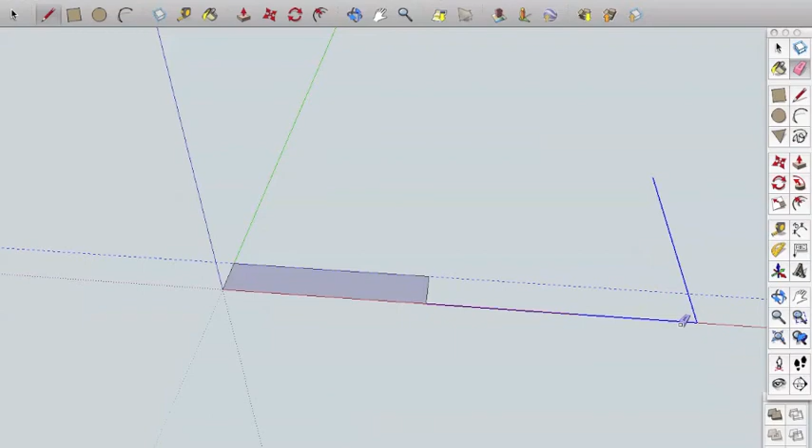Google SketchUp is great because it really snaps to everything. It finds the points and the connections. I can get rid of my ruler guides too. Alright, now we're left with just the square quarter of the rough dimensions of our board.

So you can go into camera and you've got all these different views, and the shortcuts are right there. They're handy when you're designing, so I'm just going to do a top-down view here. We're just going to really quickly draw a shape on this board. This is nothing specific, just to go through the motions of how we would design this.

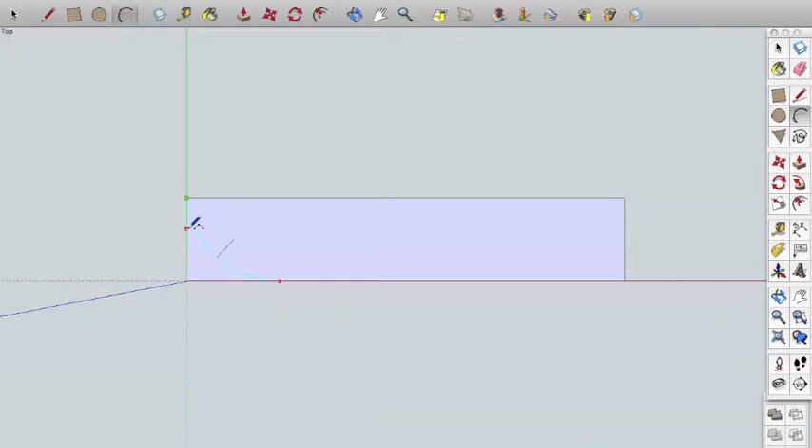So when that line snaps blue, it's tangent to the edge, which is great. And you can actually see, if I zoom in, that in SketchUp what we have here is a series of straight lines that make up our curve. So when you're doing finer work, it's definitely important to be cognizant of that. You can make those lines smaller and smaller if you want, so that they're virtually unnoticeable.

So we've got the tip of our board right there, and now we just need some side cut. Let's say I want my side cut depth to be 2.5 centimeters. The details are definitely in the design when you're doing this for yourself, so you definitely want to be specific about the numbers.

And you can go on a lot of companies' websites and take a look at what they've done. They usually post that stuff, contact edge length and all that type of thing. So I'm just going to draw this in here, a nice little side cut. I just want to zoom in and make sure I didn't go over my measurement, and it looks like I'm good.

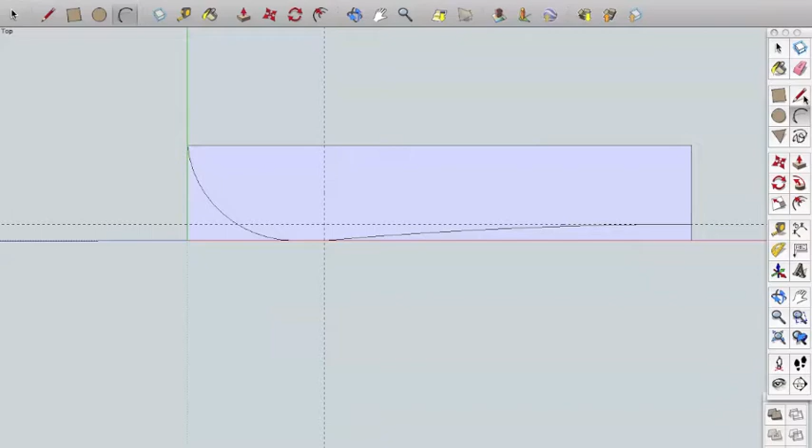Alright, so I've got my rough shape of the top-down dimension of my snowboard. And I'm already at 5 minutes.

Next thing we need to do is just quickly design the side profile of the snowboard. So I'm going to do that by snapping out a line the same length here. If I hover over a corner and move out, it'll snap, so that line is the exact same length as this line here. Now I'm just going to quickly draw it up into the blue axis so that I connect them all together, and then you can see I've got a face, and I'm just doing this so you guys can see clearly what I'm doing here.

Alright, so we'll just go with a straight camber board here for the purposes of being quick. The last tutorial I recorded was half an hour, I did a camber rocker combo, and I think that's where all the time went.

So I'm going to use my tape measure. Let's say I want 2 centimeters of camber, type that in, click enter. What I'm doing is I'm clicking on the edge, pulling up, and then typing my measurement in that bottom box where it says length, and it'll automatically go to that. So right down here you can see. At any point if I want to check a length, I can click on one edge and move it over, and it'll usually snap and give me that measurement. So this is a great tool.

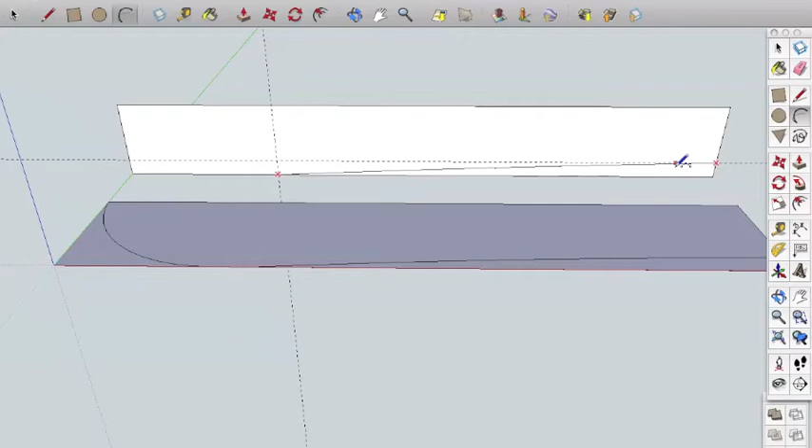Alright, let's say I want my camber to end at 56 centimeters from the middle. There we go, so I'm going to just draw that to there. This might be a lot of camber. It does look like a lot of camber, but for the purposes of showing you this quickly, I'm just going to do it.

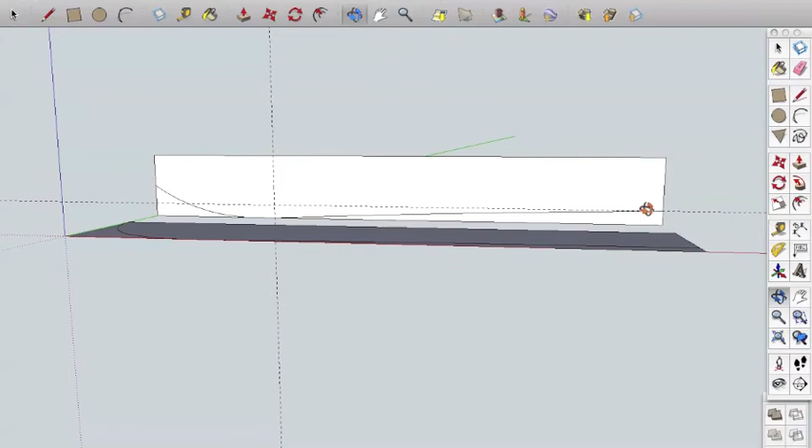Now I might just leave a little bit of a flat spot in here, and I don't want my tip to be too high up. I'm not going to actually make any measurements here, I'm just going to throw that in just like that. So you can see that's the bottom profile of my snowboard right there. This is the bottom of the side profile. Now what I need to do is thicken it to where my core will actually be, and then we've got the top profile there.

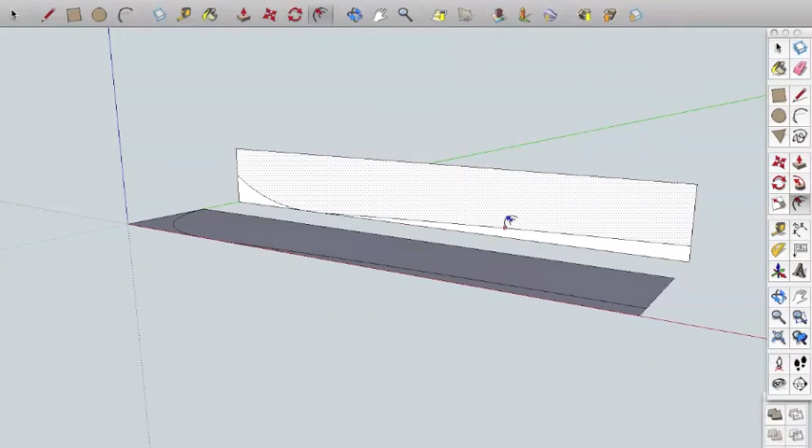Alright, get rid of these ruler guides. I'm going to use this tool here, and make my core 6 millimeters at the thickest point.

And then I also need to make a taper in the tip. So what I'm going to do is just delete these extra lines I don't need. Delete that one.

Alright, let's say I want it to start tapering after my binding. I haven't done this yet, but let's just quickly snap a measurement out. I like a wide stance, about 24-25 inches. Even though we're working in metric here, we can just type in inches. So half of 24 would be 12, so I'll make sure I put the inch sign, and that'll snap right there. I can see, because both my profiles are lined up, right where my binding will be.

So that means I'm going to want it to start transitioning somewhere around here. So I'm just going to draw a quick line up to isolate this side. I'm going to use this tool again, but this time go to about 2 millimeter thickness, which is fairly common for tip spacers.

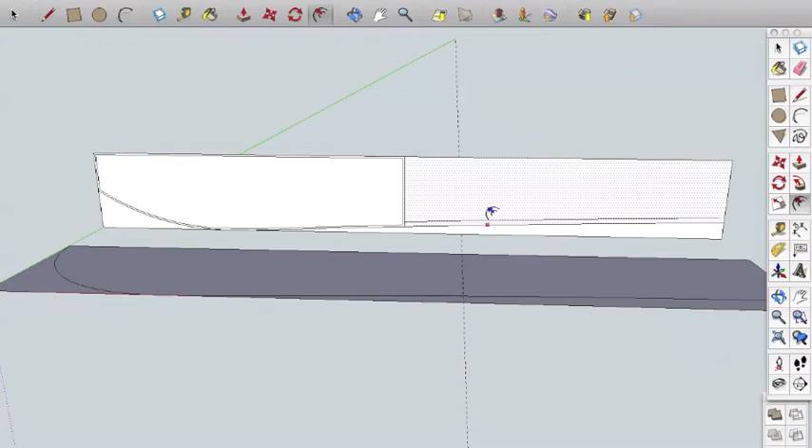So now I've got my 6 millimeter profile, my 2 millimeter profile. Again I need to go in and delete these excess lines, and this little guy here. Get rid of that one, get rid of that one.

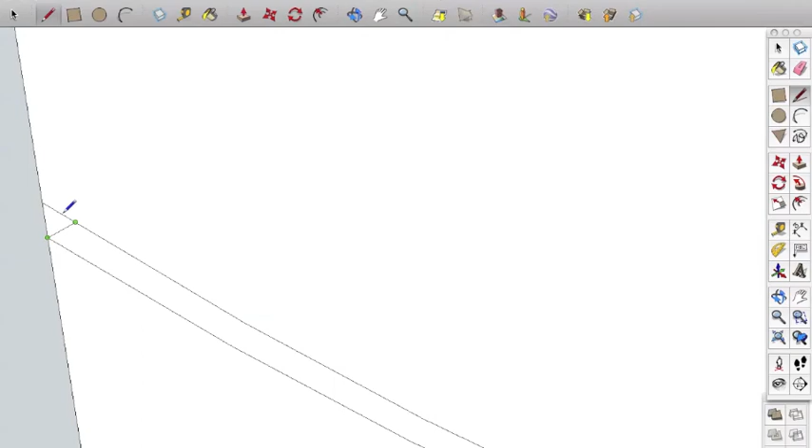Alright, in the tip here I just want to make sure it goes right to the edge, so just follow that straight, and then I actually need to connect it at a 90 from what the base angle is. You can see it just turns pink and snaps right to it like that. At this point I can actually get rid of this and this, probably get rid of that.

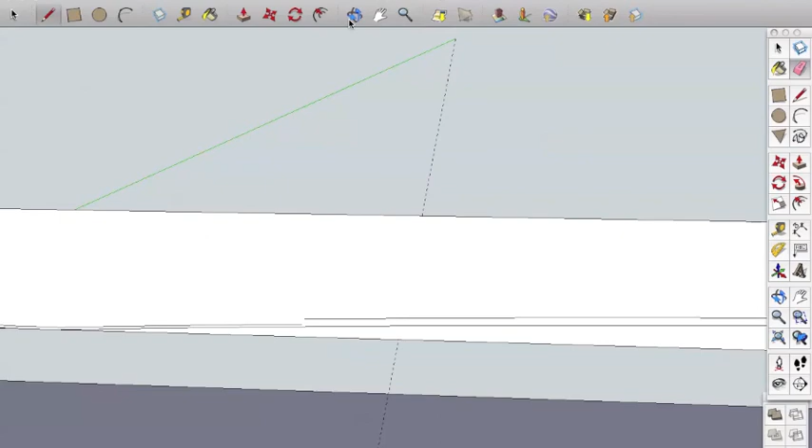Actually let's go back a second. Let's just get rid of that one for now so you can see what's going on here. Alright, I'm at the 10-minute mark, and this is turning into a long video again.

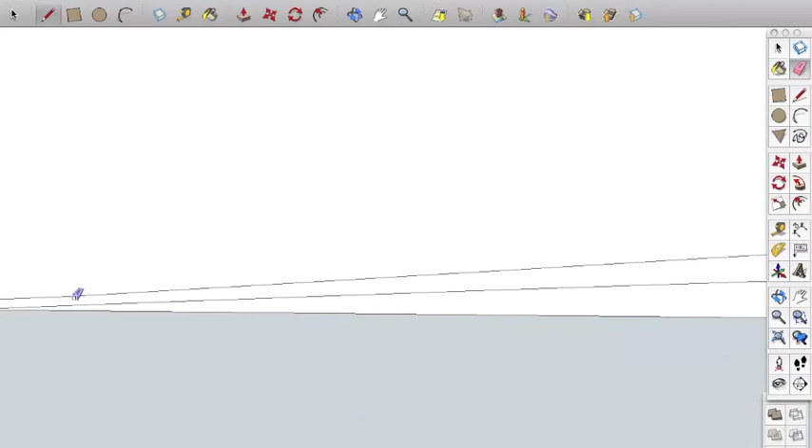Okay so I need my core to taper, so I'm going to just grab that. I'm going to just have it taper in randomly. I'm going to get rid of this excess line, make sure there's no little bit sticking out there. Looks like we're good, now I've got my tapering core.

This end actually didn't connect either because of how I pulled the measurement off there, so I just want to make sure that that actually connects. And now we can get rid of all the excess.

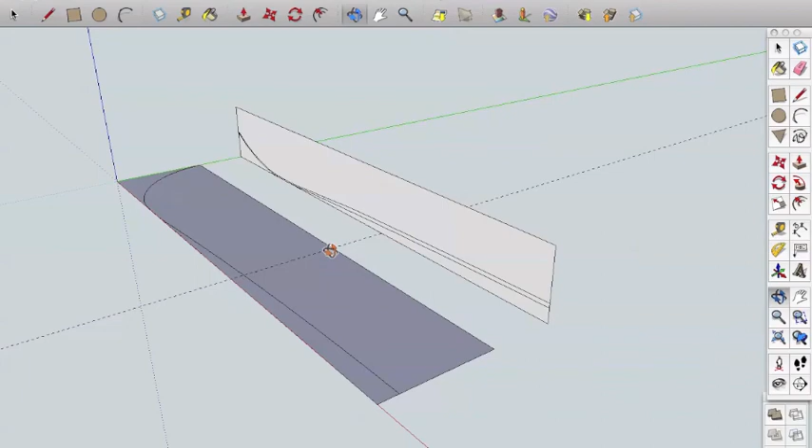But what we're going to do first is draw some binding inserts in here, and then make a copy of all this so we can easily come back and change anything we want. Binding inserts are typically 4 centimeters by 4 centimeters apart from each other, so half of that would be 2. So 2 centimeters is that one, and if this is the center of my stance, I'm going to go 2 centimeters off this side, 2 centimeters off this side, and just plunk some little circles in there so I've got a nice visual.

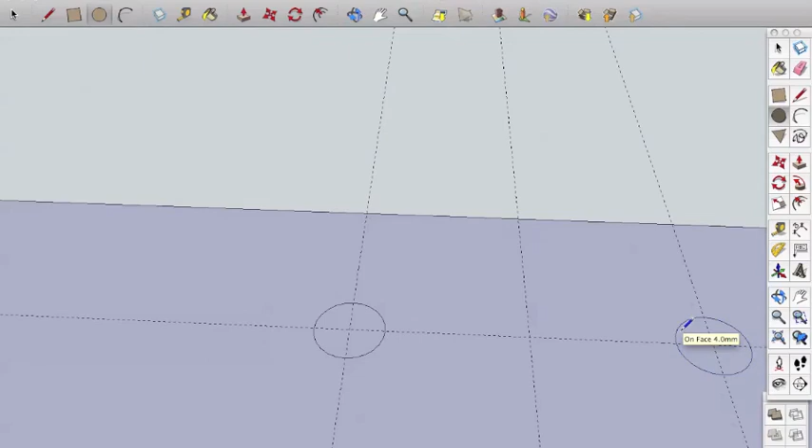Let's say 4 millimeters. There we go. And I can delete all these guidelines again now. Alright.

I think I'm going to have to break this up, so I guess that's part 1. We've got our 2 profiles.